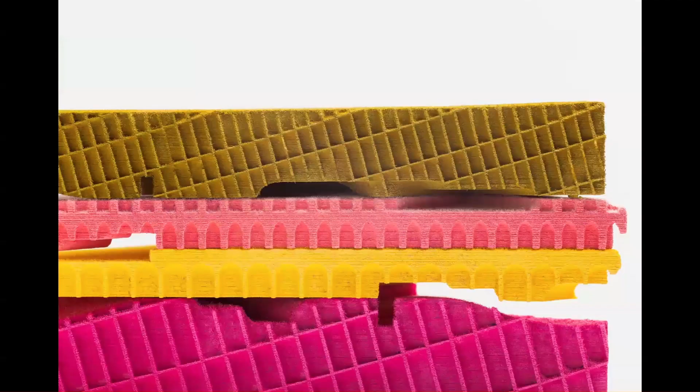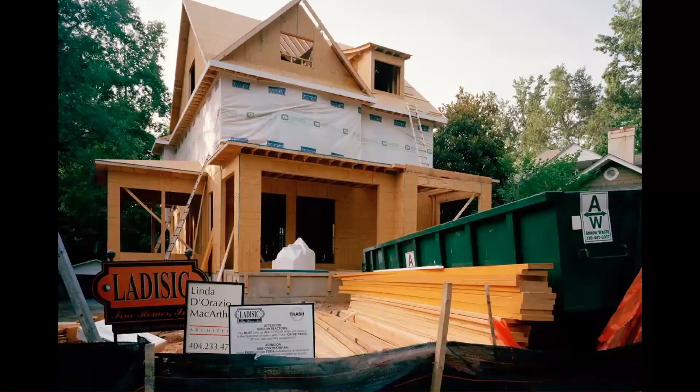So we often look to things outside the discipline of architecture, found in pop culture, like sandwiches, picnics, candy shops, and dollhouses. I'm interested in the ordinary, like artificial grass and stucco, and the everyday, like wedding photography or everyday construction techniques, and how all this material can become the starting point for the architectural project.

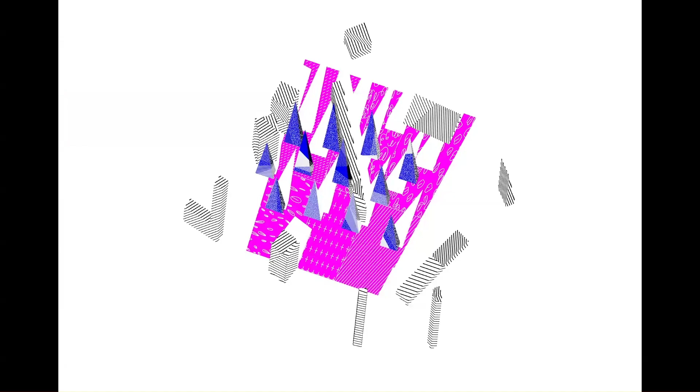Moll is interested in the project of representation, which I would argue is the only realm for the architect until she builds. It's a driving influence in all of the work, and for me a representational project is an architectural project. This is another axon that snaps into view only from the top level of the Hard Rock Cafe parking garage located on Boston's Rose Kennedy Greenway. So this is that axonometric view.

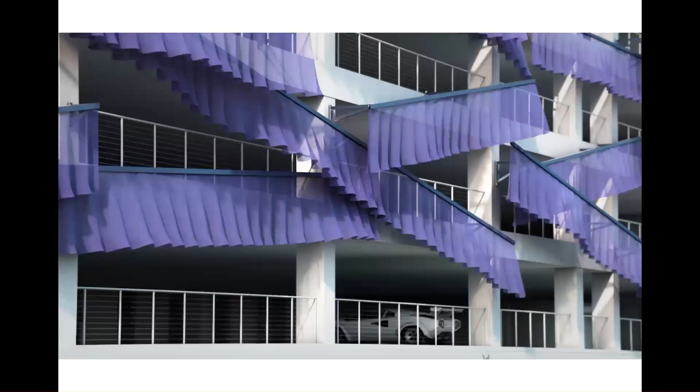We have an affinity for fake, artificial materials that look like one thing but act like something else. There's also an intentional link to art practice and the works of contemporary artists such as Barbara Kasten.

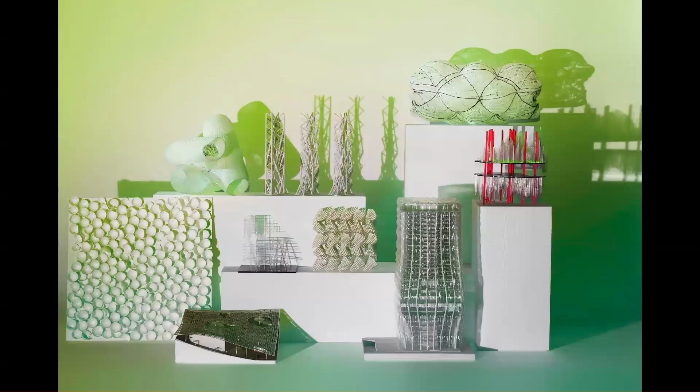Kasten's use of colored gel photography inspired a project titled Still Life, which became the driving force of an exhibition and publication at Harvard GSD. In my first year of teaching, I was tasked with being the faculty editor for a 400-page book, which ultimately became a demonstration project back to the school, asking students and faculty how they might start using more color in their work. I know it's hard to imagine, all of you sitting here on the West Coast, that the East Coast doesn't use color, but it's definitely a thing.

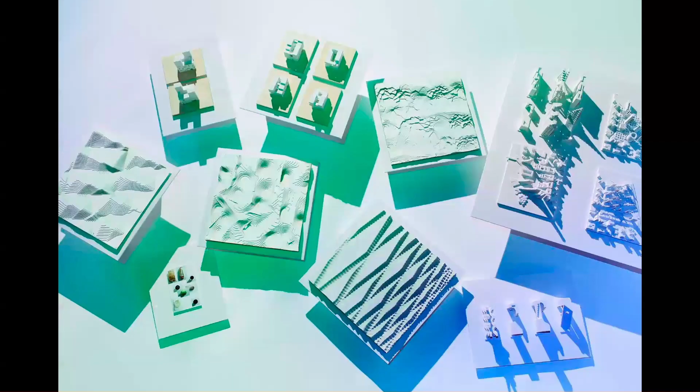Other artists like Mary Corse's white light paintings, where she painted with highway reflective beads for works inside the gallery, became Moll's cladding system for a 55-foot-long glowing brick facade in Atlanta. The work is admittedly graphic, and it uses techniques of redaction similar to John Baldessari's big circles, seen here, and in two accessory dwelling units for the City of Los Angeles's standard plan program. Lean-to ADU and Big Circle ADU reference all-American lean-to sheds, while also reinterpreting two Los Angeles architectural mainstays: the stucco box and the exaggerated false front.

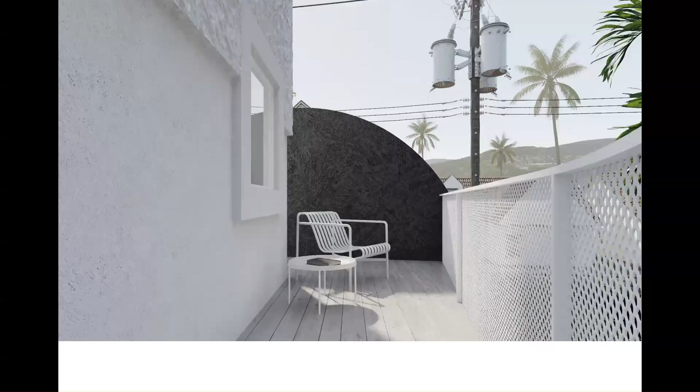We draw from bungalows, consistently mixing the low and the high, such as the white house black trim look that's very popular on HGTV and in pop culture.

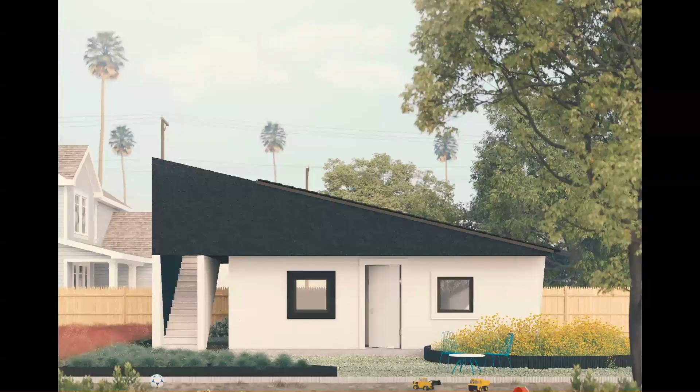There are two ways in which color appears in my work. First, through color blocking, as you see here in House Gables. And then the second is through color gradients, in equal doses of syrupy pink and blue.

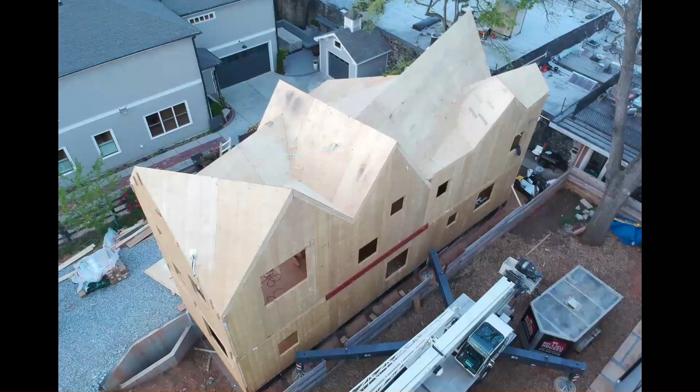Lastly, I'm drawn to material systems like cross-laminated timber and the way it has the potential to reset the discipline of architecture. Okay, so now diving into some of the context of what you're all doing in studio.

In 2020, during COVID, I co-taught a studio at Harvard GSD, an option studio with Hanif Kara from London. We put together an idea about a studio that would be around the CLT blank. This is a letter I wrote Hanif about midway through the studio. We're really thinking about this material as an industrialized object. You all know the 4x8 sheet of plywood very well here in Los Angeles, and know how that shepherded a generation of architecture and experimentation. Now we have the 9-foot by 50-foot blank.

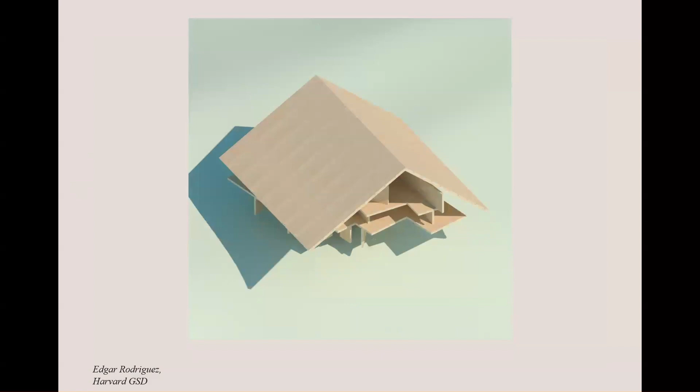After the studio, we produced a book called Speculations on CLT that I'm going to chat through. Here's a demonstration of Edgar Rodriguez's project, where in this short GIF you can see how the blanks can become walls, they can become floor plates, and they can become a large overhang roof.

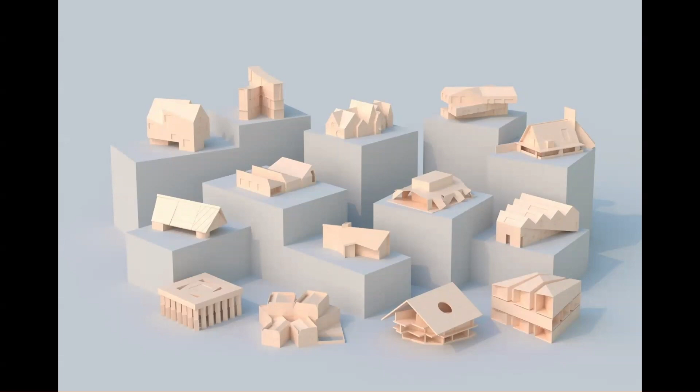In the studio that Arian was a participant in, we asked students to design 14 single-family houses and 14 towers. Half of this semester was in person, and then the COVID lockdown happened. So this was a tremendous amount of work by a group of students, and here's where the blank comes in. If you look at the towers, you can kind of see the registration.

The students kind of took two tactics. Half of the group wanted to deny the reading of the CLT blank, meaning cut it up and arrange it in ways that it can't be seen or easily read. And then half of the group really used the CLT blank as a registering device, like in the structure or in the exoskeleton.

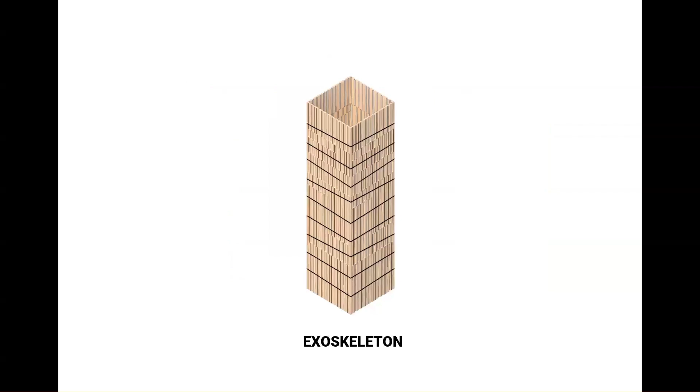This brings me to Anna Gogo's project, who won the Templeton Kelly Prize, where she does something really simple: she takes the blank and makes a wiggle cut down the center, then bandages two CLT panels together. So she has 300 CLT panels, 400 cuts, and 400 bandages, producing an exoskeleton with these kind of steel belts tightening or cinching the whole project together.

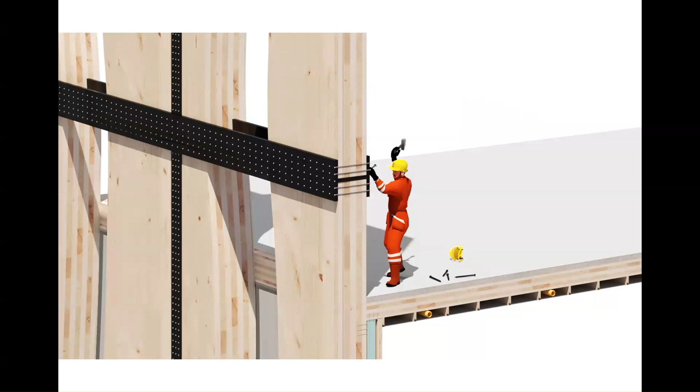We're very much interested in the construction and the ideas around how to actually make this work. So I think this is technique number one: you can cut CLT into any shape, and then you can put surfaces back together in interesting ways.

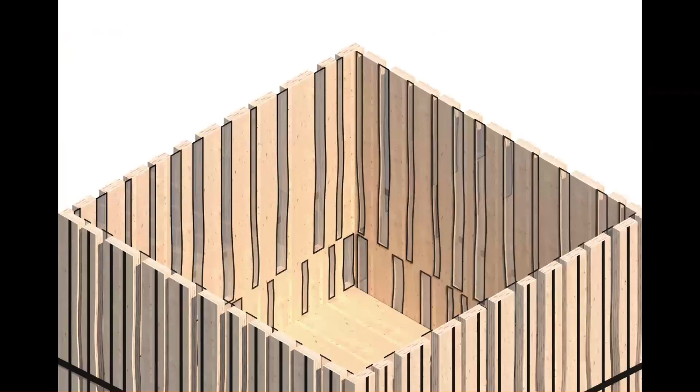There's no way to move that thing up a little bit more. If it's not bothering anybody else, I can let it go. Is it annoying?

So this is the essay that I wrote called Switcheroo Blanks Everywhere.

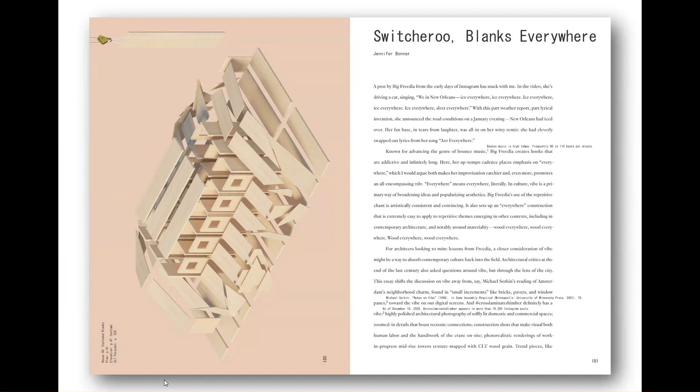Where I'm really looking to artists like Richard Serra. He actually had a project from 1978 called Blank, where he's using these kind of oil paint sticks in proportions eerily similar to the blank that we were talking about in studio. I also advocate for the kind of performance of the blank on site—they kind of remind me of dangling earrings when the crane comes out and the blank is being installed.

We asked architects who have used mass timber before to make contributions within the book with essays. And then we also asked some architects that have never used the material before, because we think they have something to say in terms of representation or strategies for architecture.

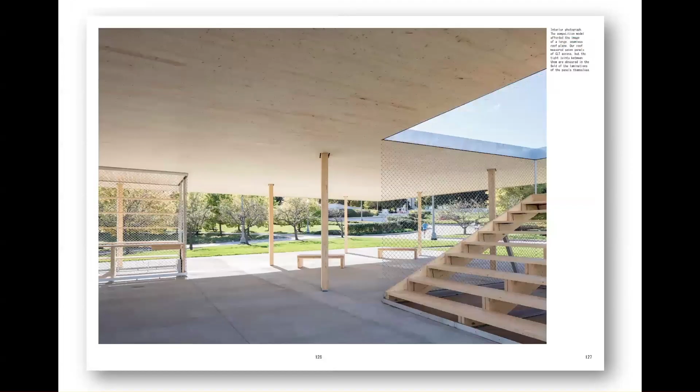This is an essay by Yasmin Vobis, and she talks about the 10 points on the CLT model. And then this is her project, Ultra Modern, with Aaron Forrest. You have to know the context of this—it was built in 2015, a very young academic practice, a very young view on the material. That's 10 years ago. I want to say that I think this is one of the best and most interesting CLT projects in the whole country. Even though small, it's doing a lot structurally, and when I first saw it, I was like, it looks like me.

So I don't see how they're pushing anything, until I started to dive into what it actually is.

It's a two-way spanning system, just in its own cross-laminated application. In order to get these distances in these cantilevers, they cross-laminated the blank itself, so they have blanks going one direction, then more blanks on top. The thickness of the roof is actually two blanks thick. So there's another idea: doubling up the blank and sandwiching it, or cross-laminating its own material property.

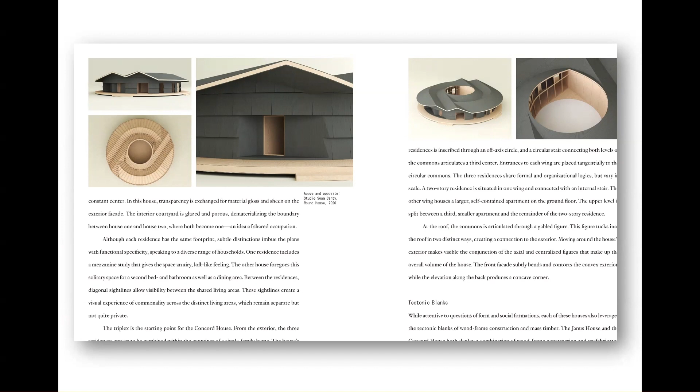Another essay is by a historian of plywood. We found her work at the University of Virginia. Her name's Erin Putalik, and she was looking at the plywood of Los Angeles and Southern California in the 1930s and the experiments manufacturers were undertaking. She's really interested in the surface of the plywood, the graphic, the wood grain.

Then she dug out a female architect from 1941 called Eleanor Raymond, who had never been published. Eleanor made two houses in the Massachusetts area that predate Walter Gropius, which is pretty amazing—she built these two experimental houses with plywood.

On the left side, you can see the material unit, 4 by 8 feet, and the cladding system—the legibility of the material unit is on the facade. For a more traditional client on the right side, the client asked Eleanor to cut down the plywood into shiplap siding boards. Remember, this is New England.

So I think this is kind of the thesis, maybe point number four—I don't know what point I'm on right now—is that the idea could be the material unit itself, or you could disguise the material unit and cut things up.

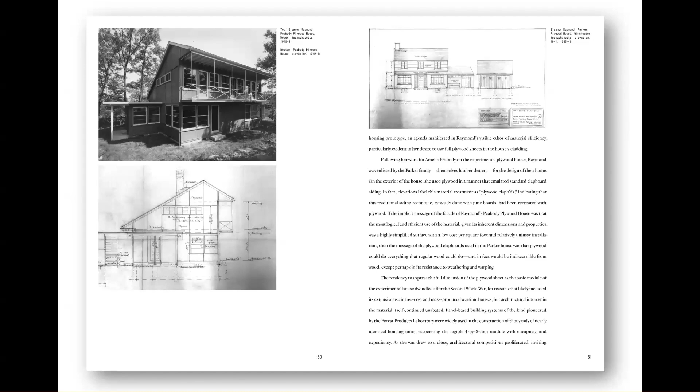She also references John Baldessari and Jose Davila here from Los Angeles, which is very much about redaction and this kind of blankness obscuring the image or the architecture behind. So point number five: can you obscure the architecture behind with the blankness of the CLT blank?

Very much part of the recipe, the mall recipe, is looking at what contemporary artists are doing in practice and seeing if there's possibility in that work to drag it back into architecture.

This is the work of LA-based artist Lauren Halsey, who won the Hammer Prize this year and built this pavilion or sculpture out of gypboard. Inside the gypboard, which is a blank kind of material, she cuts bricks, carves messages and imagery into the material.

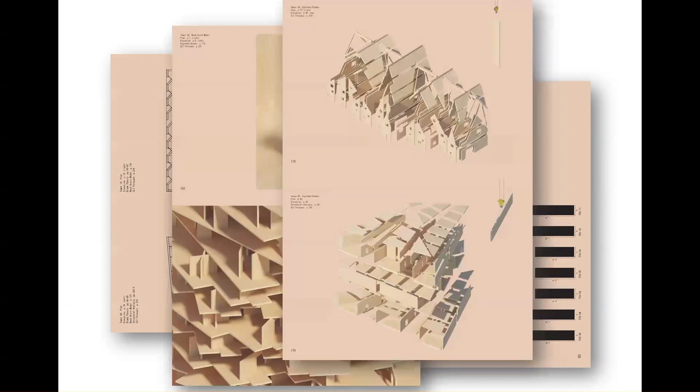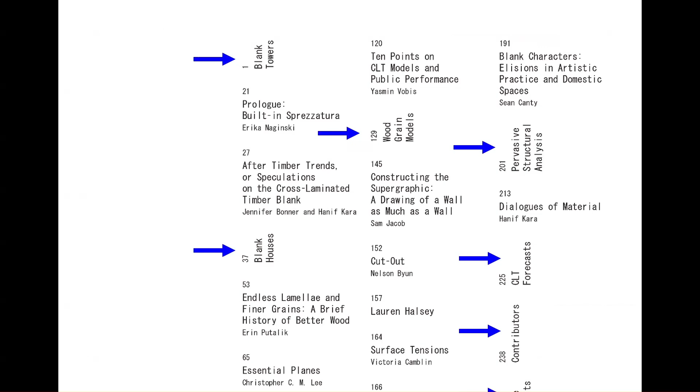And then all of that is interwoven with these essays that I just introduced. So when you actually turn the book, it becomes a cross-laminated situation. If you look on the spine of the book, you can see all the layers, and it reads as the CLT blank does as a tectonic material. Does that make sense?

Here's a student who also cut up the CLT blank into a kind of siding, a proposal for siding and cladding. So the blank is in there, but it's been cut and distorted.

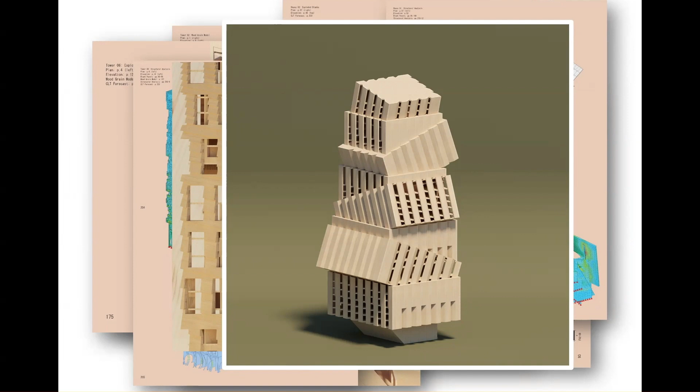This is Ariane's project, and you can see that the 50-foot tall blank becomes a registered device for the tectonic of the tower, which are these stacked boxes that have office floor plates on the interior.

Instead of using beams and columns, this student was really looking at the lamination of CLT as a facade surface. Right where things get tricky with the cantilever, there are more layers put behind to make that cantilever achievable, and then it becomes kind of cartoonish.

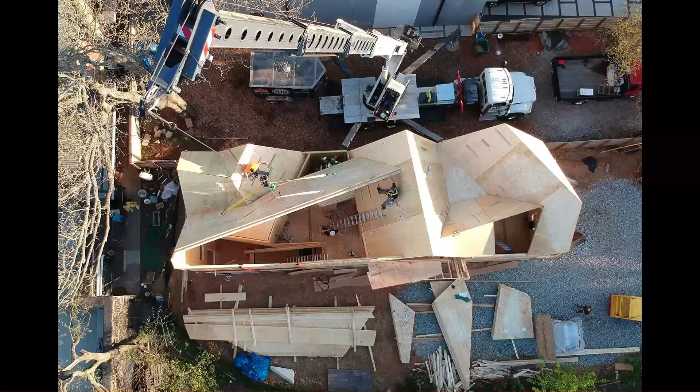Okay, so I'm going to go in reverse of what I normally do. I taught the studio, did the book, and then started to bring those ideas straight into my practice. So I'm going to show House Gables next, but first I'm going to show Blank House.

House Gables, as I mentioned, was 2018. It's a project where I cut up the blank. I didn't even have the idea of the blank yet, right? So I was rationalizing geometry. There are 87 panels, they're all different, but you can kind of see the image of the blank here on the construction site.

But here's the blank in Blank House. It's 7 feet wide, 30 feet tall in some cases, and then there's an idea about cutting a seam in it.

Using a crenellated facade, this is some of the blanks coming together for some of the east and west elevations, and here we see the windows getting dropped in.

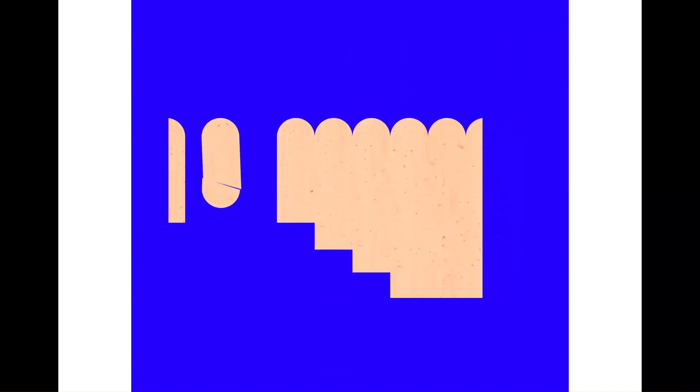When the blank becomes a surface - remember if you think back to the Mies van der Rohe example - you can actually move these windows around. You don't need a steel header or a steel footer around the window. Imagine the scattering of these windows across the facade.

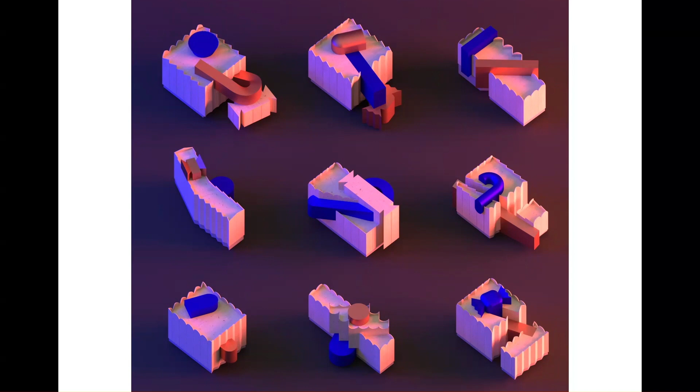As I mentioned before, a lot of my work has to do with other things in pop culture. These were early models around candy, so you'll see things like Grandma's hard candy or Reese's cups - yeah, that's a Reese's cup. There's this idea of, can there be an ADU on this property? Gumdrops, and of course, candy canes.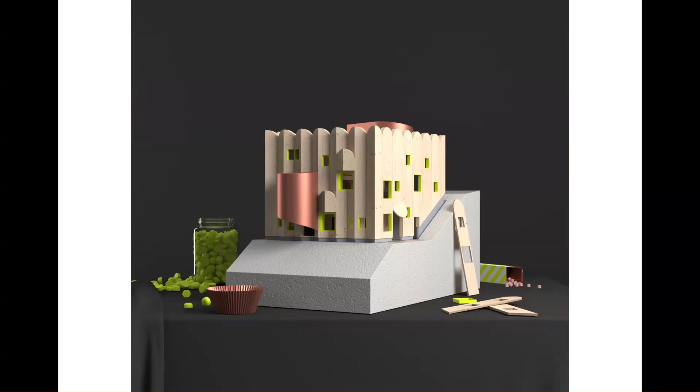So yeah, back to the representation in this kind of still life - there's an idea that the house looks like it's part of a scene from a still life, and that candy is kind of on display.

And here's the candy wrapper facade, and the candy inside the house. Not a good idea structurally in a seismic zone, so don't write that point down.

This is the detailing with KLH out of Austria. In order to get these kind of innies and outies, this is the strategy for bolting things together. The chamfer would be all hidden behind the other layers of the cladding system in the project.

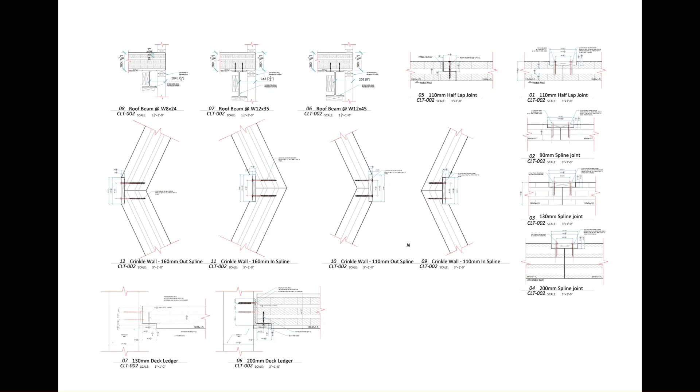I don't think y'all are going to get this detailed, but there are different thicknesses and plies to CLT. This is the interior, kind of like a naked blank model - I took all the blanks away and then did these still life interiors.

And then I just want to point out, this was done about 2 summers ago. We put popsicle sticks in the gym area. So just remember that. We'll circle back around. Well, here we are.

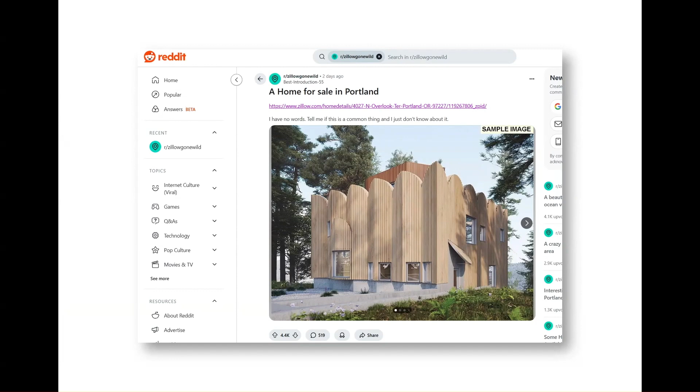So 9 days ago, I listed it on MLS, the design, the lot, the property. And it went viral on Zillow Gone Wild on Reddit. Many of the comments are around the popsicle sticks. There's 500 comments and 4,000 upvotes, and everybody kind of got it. So that was good news.

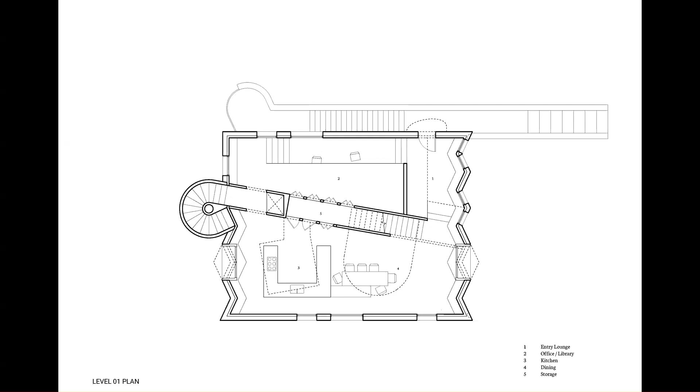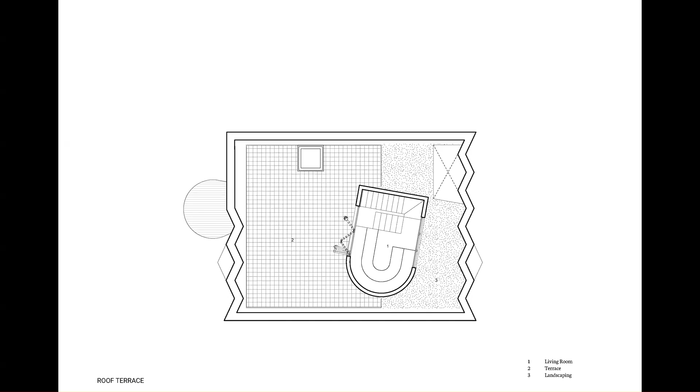And then the upper floor is a mezzanine, and it's about 3 leisure spaces. So a sauna, a gym, and a little yoga exterior terrace, all hidden behind the expression of the CLT blank. And then a roof terrace with a sitting area above.

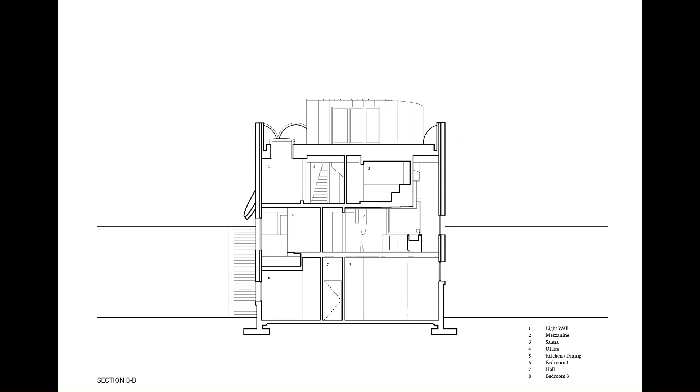And this is how the slope is really severe, much like many of the leftover parcels here in Los Angeles, greater than 20%. The idea was how to stack 3 layers within the maximum zoning dimensions on site. And here's the blank house sliding down the hill.

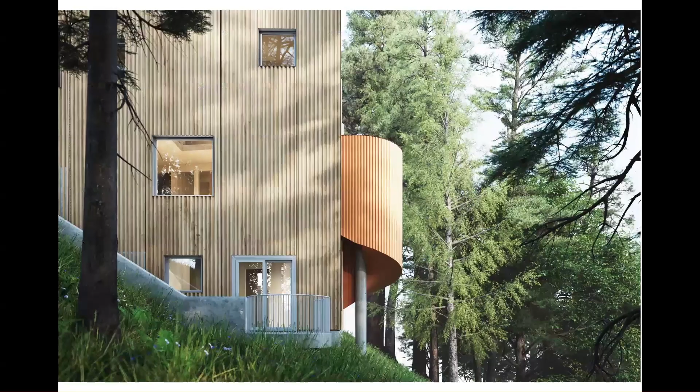So, we're looking at a house, but some of these things can apply to you all. I'm thinking about surfaces, cuts into the surfaces, double height space, strange proportions. This is a very narrow space.

It's a desk that then becomes a floor. So there's kind of a lot going on there, or this kind of telescoping spatial effect through the mezzanine level.

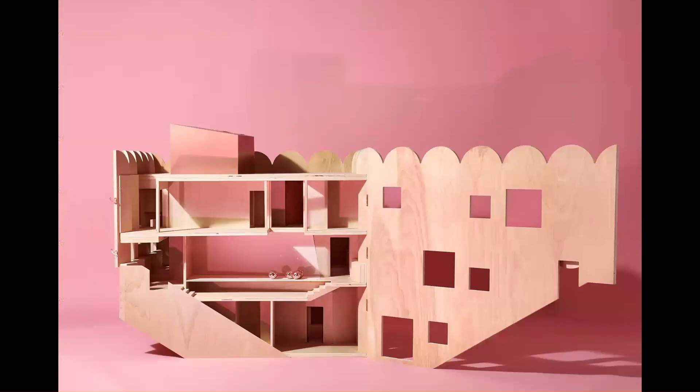And then, as mentioned, all of the work always goes through this representation machine. This is a 1 to 12 scale dollhouse model currently on display in Portland at an interesting show around models. We hired food photographer Dina to come and shoot the project, with a backdrop of AI generated Doug fir trees. And these are the incredible images that she made that day in the studio.

And then pink is always prevalent in the work. So we had to kick the Doug fir tree backdrop out and go with something pink.

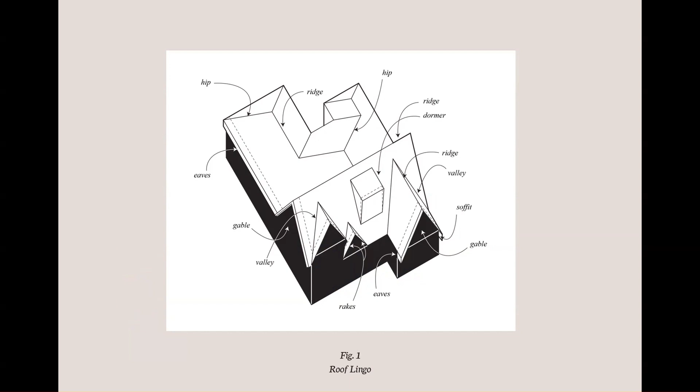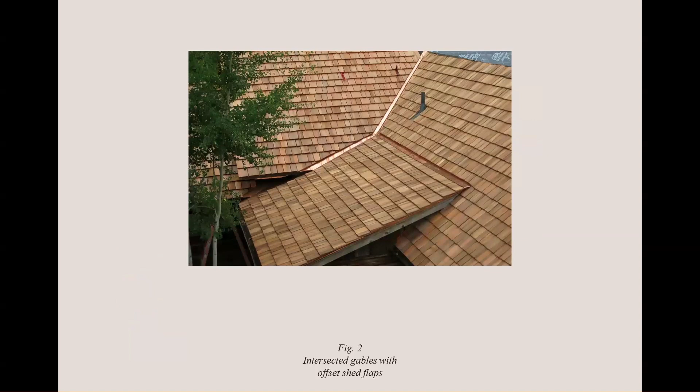Y'all know what roof typologies are. Y'all know what angles are. This was research that I did in 2015, 10 years ago, reading roofs in suburban locations across America, but specifically in Atlanta. This is a good one in ATL: front facing gable with a camel backed hip plus a rotated gable bump in the back.

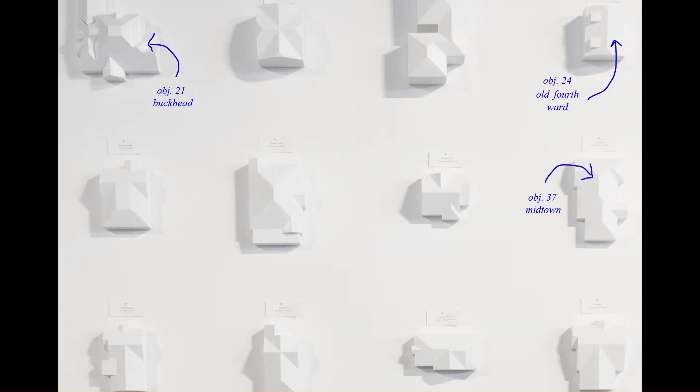And so this became the obsession for House Gables, interested in villas that need 8 different roof types to cover the floor plan versus something more modest like a shotgun house in Cabbagetown, which is a simple hip roof plus a gable. And this led to a body of work called Domestic Hats.

These are really large scale massing models. I won't get into all the ideas around it. But then we took the models back out into the front yards of the actual houses in Atlanta that we had sampled and dropped them off as yard art in the front yards. And we were gunning for Michelle Nunn that year for US Senator. So that became the postcard for the exhibition.

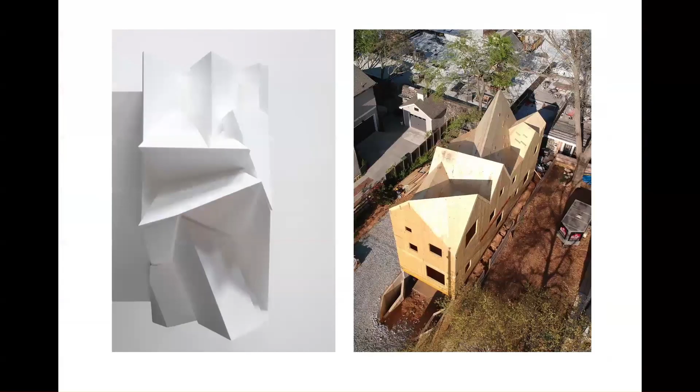So here's House Gables. The idea is to take the foam model and build the model at 1-to-1 scale. And the way to do that in a most solid, stereotomic way, I guess, would be to make it out of sheets of CLT. There's 6 gables crashing into one another.

We are all familiar with things like the free plan, the Raumplan. I'm sure we can find those ideas in your projects in studio right now. One suggestion I have on the table is to kind of push those away and really take on or tackle this idea of the roof plan. So can the roof's geometry inflect decision-making and organization-making in the plan?

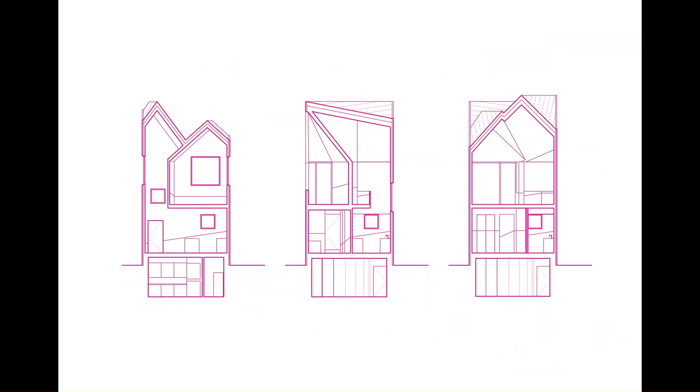And then what you get in section are things like this, which I call a roof room. It's being hung by the folded plate of the larger roof above.

This is my favorite view of the house. It's kind of the kid's drawing or picture of the gable. It's nested deep into the project. It's on the 2nd floor.

And here's where the structural concept is on full display. Here's the folded plate that I mentioned, that's the 7 roofs crashing together. And then this room is being hung, but then not really, because all of that's being transferred down the CLT guardrail to a steel beam that's in the framing of the 1st floor. So you can really trace the forces of the structural strategy in the image, which I'm like, okay, that's cool.

That's what I think the Ultra Moderne project does that I showed you in Chicago. When building on tight, narrow lots in Atlanta, this house is only 18 feet wide. I think the promise of the roof plan is that we can have a double height space, and we can have spatial interiors instead of being in kind of flat ceiling conditions.

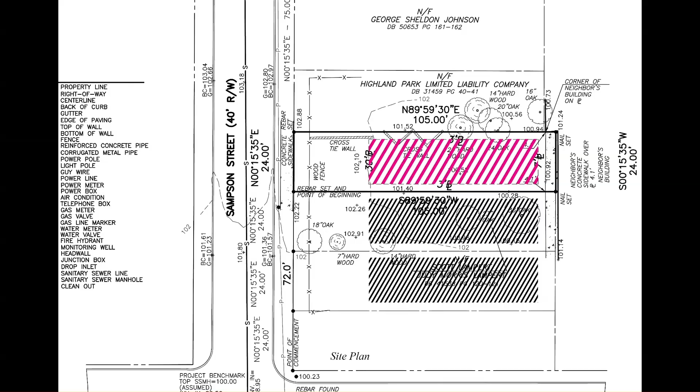The site plan, just behind here is what's called the Beltline. I don't know if anybody's from Atlanta or knows anything about it. The New York Times wrote an article, "A Glorified Sidewalk and the Path to Transform Atlanta." I thought that wasn't very nice. It's a very exciting project that's driving development, and it cuts through 45 in-town neighborhoods, and Atlantans are walking and being outdoors.

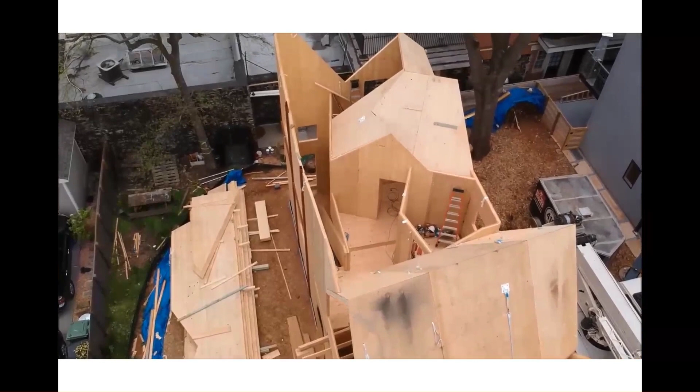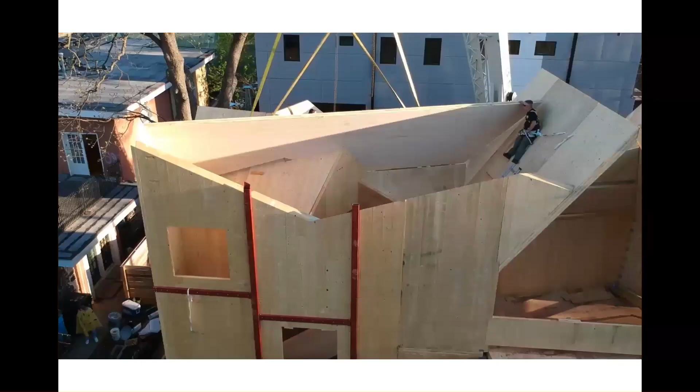This is the construction video of House Gables. There's 4 people on site installing the 87 panels. It took 14 days. All the material is kind of piling up here on the left in a neighbor's property. The walls are 3-ply CLT. The floors are 7-ply, and the roof is 5-ply. So these layers of CLT are distributed in different ways throughout the structure.

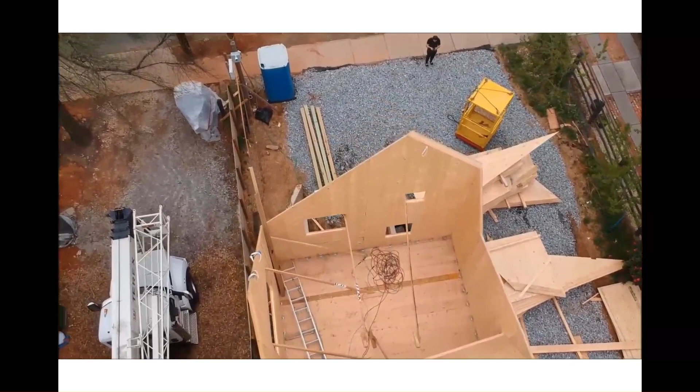Yeah, I think y'all have already learned this, so I'll just skip through it. Everybody got this, right? Yeah, okay, that's great. What was cool, or what drove kind of some of the decision making at the time...

In 2014, 2016, as we were planning the project, each of these pieces, like 75% of the 3-ply walls required flip milling. There was no North American manufacturer at the time that would do the flip mill. They would cut it on one side, but not the other. And so that's how we got all these mitered cuts. In Austria, they've been cutting these panels for like 30 years now, and so they were the only ones that could kind of pull it off.

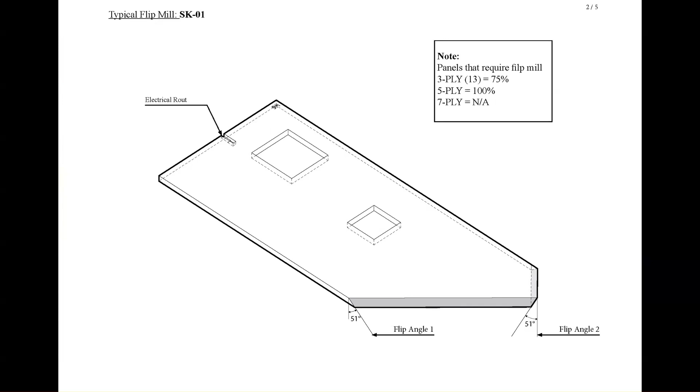For the roof panels, all of them are flip milled. And then the floor panels, obviously none, because we're just cutting them out, right?

So this is the way the material arrives on site. It's kind of this virgin spruce that after a day in the sun, it kind of turns yellow fast, but you can always sand it down and get it back to that color. So a reminder that this is a finished product. We're on a live construction site. It's been picked up with a crane, pulled out of a shipping container, and this is all like 1/8 inch tolerance to go together with the crane. So it's a bit stressful.

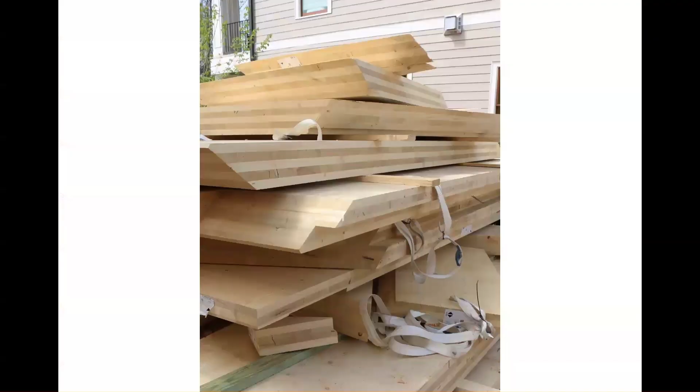CLT panels are kind of piling up. I'm teaching at the GSD, and kind of flying down to Atlanta every other day to see this thing go together.

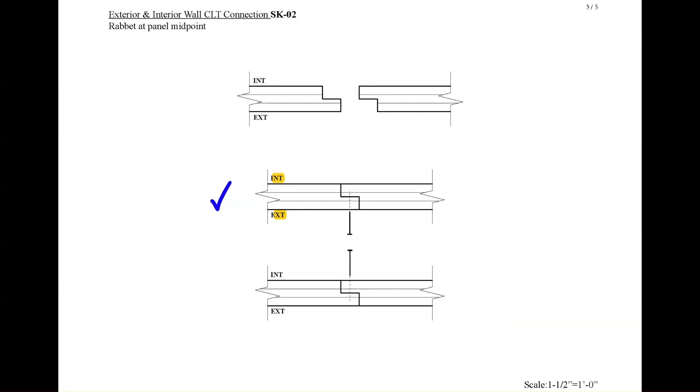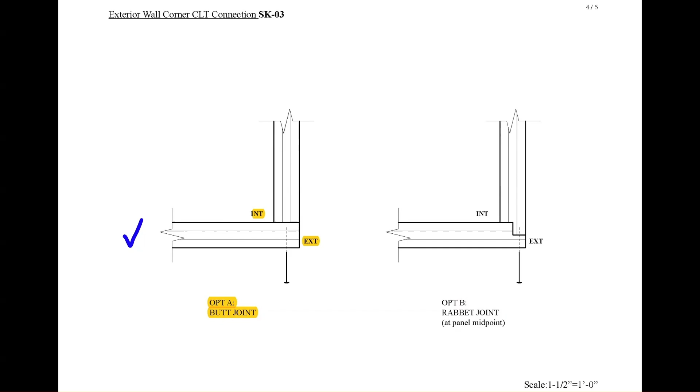When you think about these surfaces that you're going to make with CLT panels, it's really about figuring out wall-to-wall joints are best when they're lap joints. And you figure out which side you want the hardware to be on. And then corners — KLH was pushing kind of a butt joint at the time, but then talking to another architect in Portland, the air flow out is better if you use this lap joint corner thing, a rabbet joint. And so then we had all these joints in the roof.

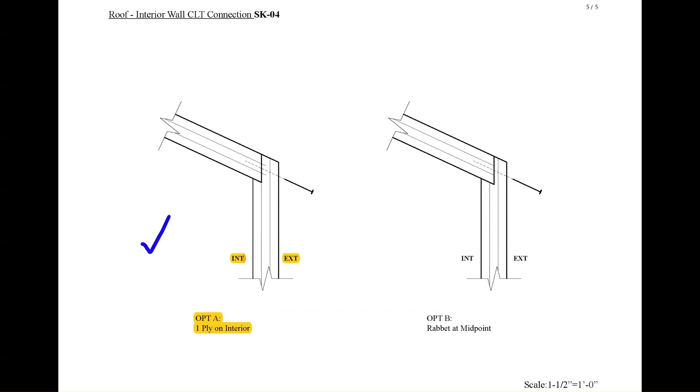So this is a roof to wall, interior wall connection, and this is a roof to an exterior wall connection. You're kind of placing it on top, and then a very long screw is being driven in on site to connect the two panels together.

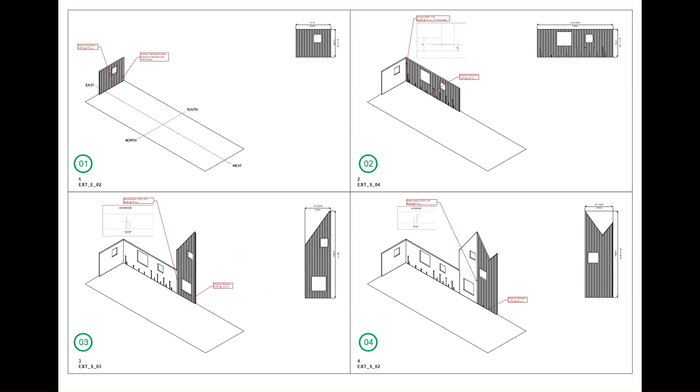In order to figure out how to put this together, we did 87 drawings, kind of like an IKEA catalog. Starting with number 1, we want to install this panel first in the very back of the project. Most times architects don't get involved in how the things happen on site. In this case, this drawing set was very important because it's where the engineer started to add their drawings on each of these erection plan diagrams.

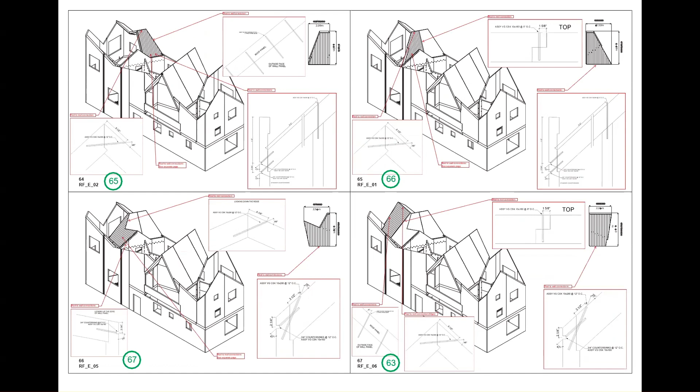You can see the flicker between not many drawings — okay, there's one detail wall to wall here — versus how it starts to get more intense. The drive angle of the screw is being called out, and none of the angles are the same. There's lots going on, and it gets more and more complicated.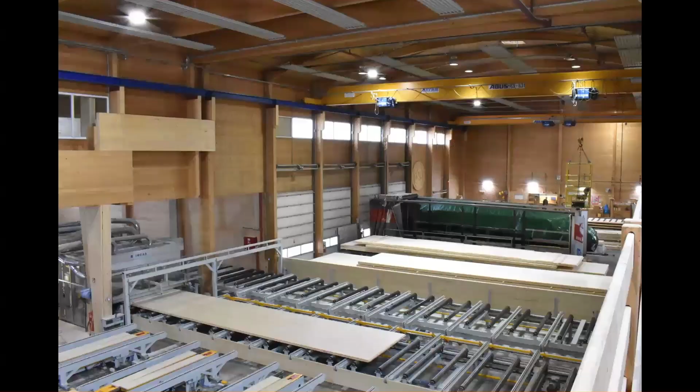I guess we're not doing good on time, are we? Okay, I'm just going to flip through.

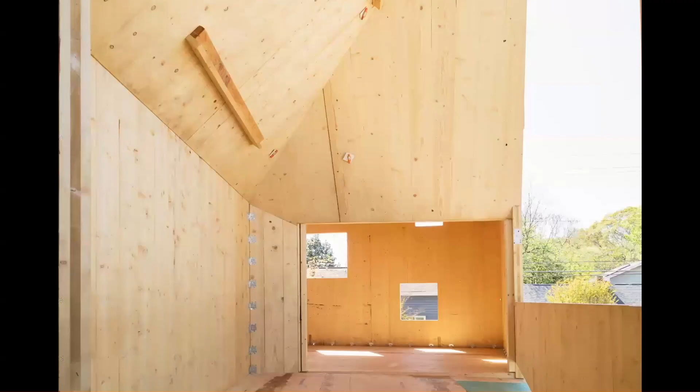Y'all get the point, this is the ordinary happening or showing up. Like this gable is in alignment with that gable, not by design, totally random. This is what the house looks like after all the panels go up. See how rough and tumble things look. I'd say the dirty secret with CLT is that you actually have a lot of labor in sanding and staining it that nobody talks about.

This is a photograph by Tim Hursley from Arkansas, an architectural photographer who decided to light the house and position the camera to take this angle, which I'd never seen before, and kind of brought this Southern Gothic vibe to the project.

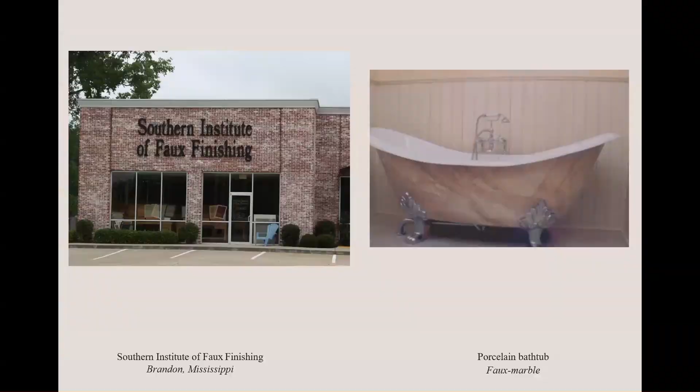Faux finishing. Okay, there's a lot of ideas in this house. This has to do with materials and faux finishing. It's just still too long of a story.

So the interior is all this CLT, right? So there was an idea to bring materiality, color, and otherness to the project. This is not a Scandinavian house, this is in the middle of Atlanta, it's in the dirty South. And so the faux finishes are acting like a wainscoting, and they're both graphic and functional, because behind the material, which I'm treating kind of like a sticker, are the routing lines for the electrical outlets.

So in the kitchen, let's just go to this. It becomes a backsplash on the counter, and then it dives down to maybe like 1 foot on the other side of the room to cover the electrical runs.

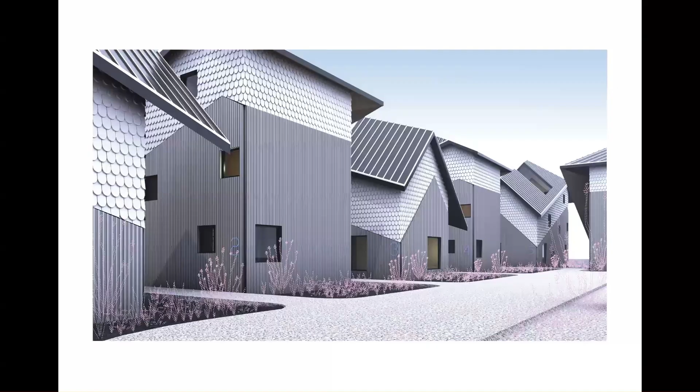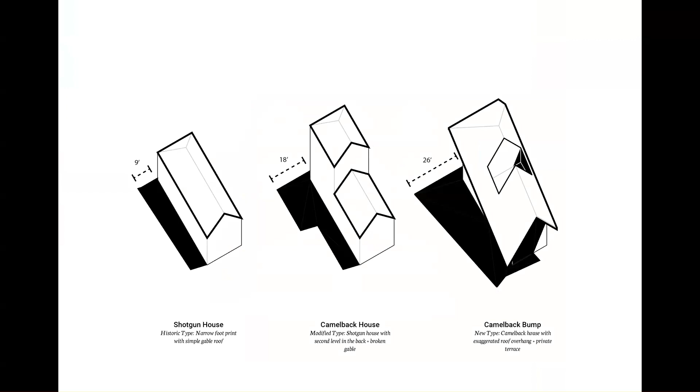Okay, and then the idea of kind of scaling this up, is a CLT house affordable? Maybe not, but maybe if we have 10 of them, is there a way to do a copy paste, kind of small lot urbanism, similar to Barbara Bestor's Blackbirds here in Los Angeles? Half of the houses could be built with 1 crane, the other houses built with another crane. You could have 10 houses erected in, I don't know, like 20 days.

Somebody said like, oh, they've multiplied, because everybody was looking at house gables for so long, and then there's like 10 more with these roofs.

This is a project that Arian worked on, actually very much has to do with LA, the 5-over-1 typology that was invented here by Tim Smith in 1990. This is what we have across America at this moment in time. Arian wrote this, I didn't write it, which is the critique of the kind of situation we have with the 5-over-1s.

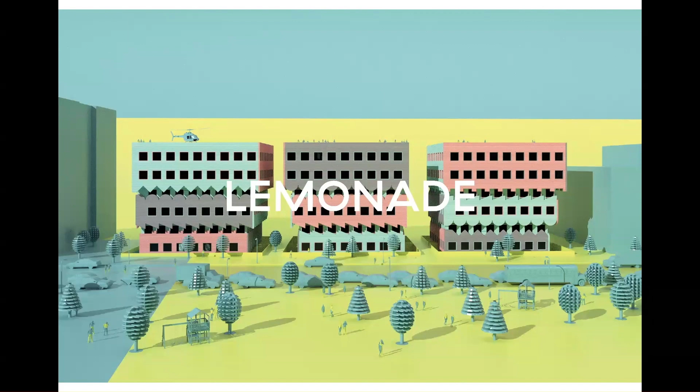So here's the idea to say Type 4, which is heavy timber, and like Type 4-none, right? Can we bring timber all the way down to the ground? As many of you know, Type 5 wood frame construction over Type 1, which is non-combustible concrete or steel buildings, very much based on code and a developer's kind of matrix.

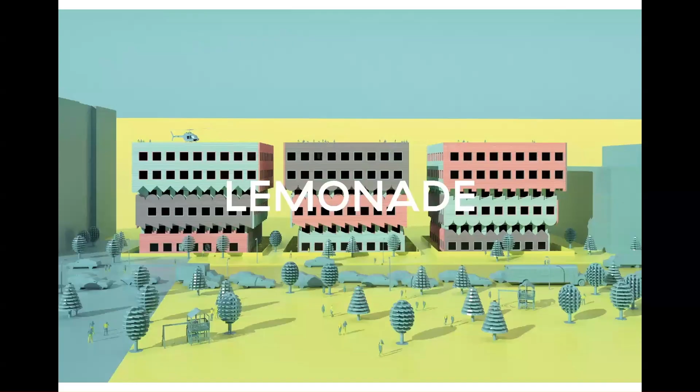And so the idea here is to take the blank, with 4 blanks you quickly can have the length of a 200-foot long multifamily housing block. And then there's opportunities to kind of cut geometry and flatness, to fur things out to offer a new reading of the 5-over-1.

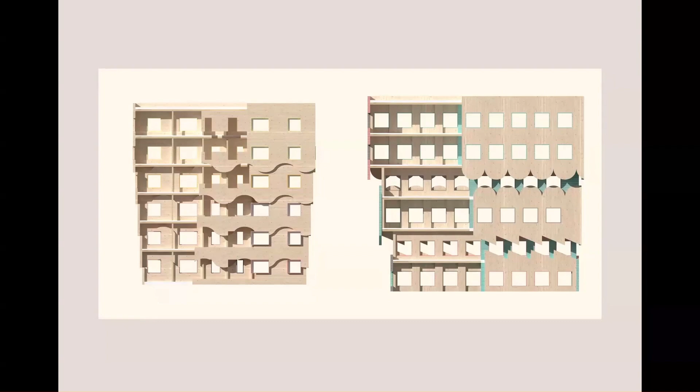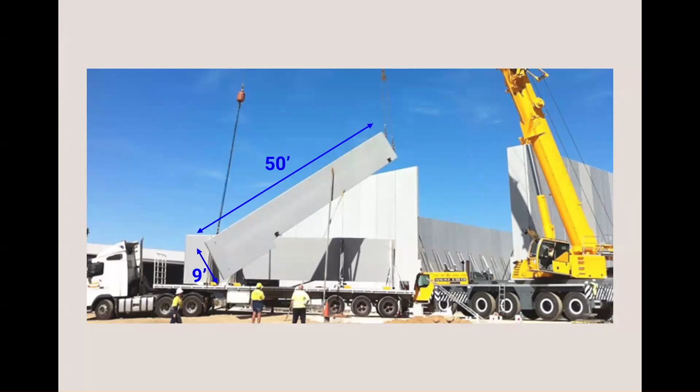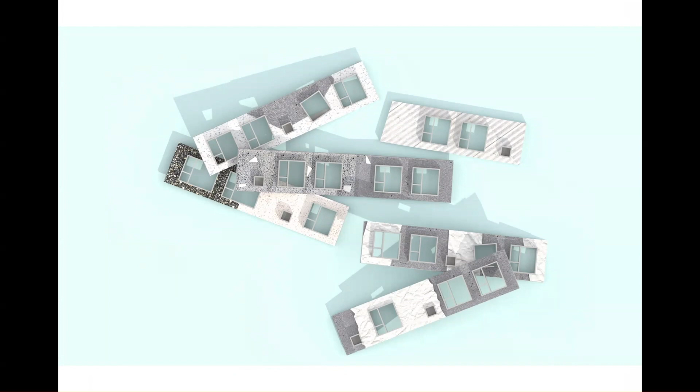I don't know, this all applies to precast concrete, same size, same kind of thinking and logic. There's ways to deform precast through form liners, aggregates, textures.

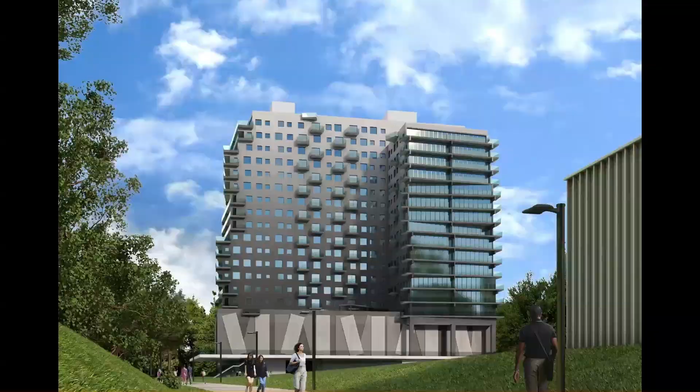Satisfying. Anyways, right, I think that's it. Oh,

All that was CLT, mass timber. We're hoping to bring it inside of this adaptive reuse project in Fort Worth, Texas. This is a former KKK building, an auditorium, purpose-built in the 1920s. The client is amazing, we are rehabbing this and turning it into a cultural hub for about 9 different nonprofit organizations. Our client is a coalition. These are my partners, Christian Stayner here in Los Angeles, Germane Barnes in Miami, and a 4th partner, Dennis Chiesa in Fort Worth.

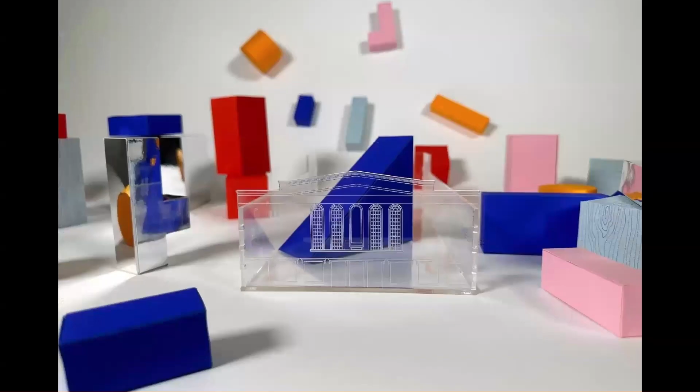So maybe check this out, it's coming in months to come. Right now we're in schematic design phase.